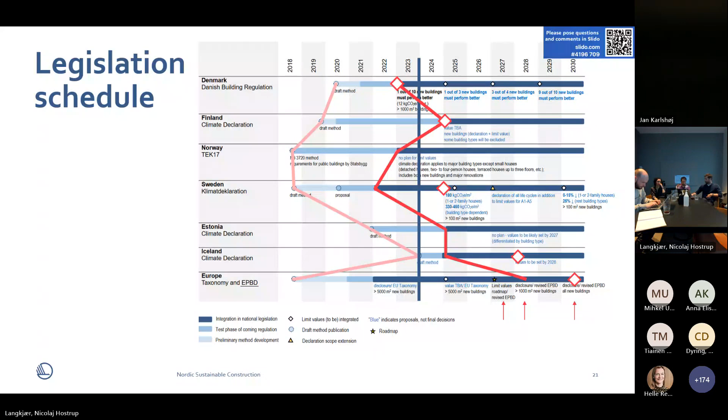So if we go to the next one - now the next slides will cover some selected issues of definitory and methodological questions, and I'll try to talk about what are differences and what are similarities, especially differences, since there's something to discuss that most definitely other countries will also face. So we try to share experiences here.

And then we have special building types in terms of industry, especially, but also summer cottages and the like, which are being treated differently. They occur, but make up a very smaller part of the building stock.

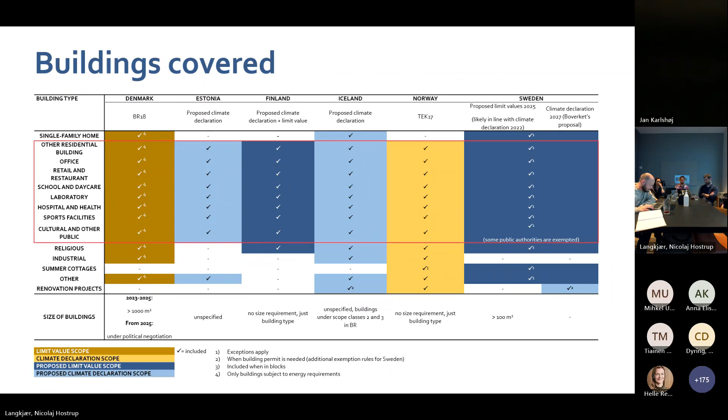Very briefly, the compliance system means how the building authorities are prepared to handle this, and whether there are current plans. This is very unprecedented, because we just have the first regulations in force right now. So Denmark, Sweden, and Norway have some approaches, but we cannot report from experience. This is the newest development, and has probably been considered the latest in this journey.

Finally, a word on different approaches to limit values - how to define what carbon limits buildings should comply with. There are broadly two approaches. In the current regulations, we see the bottom-up approach, which is based on a study of the current building stock and their carbon level, and based on that, developing a roadmap of lowering or reducing the current carbon levels.

So this would be the bottom-up approach, and the top-down approach would be that, as precedented in some studies today, if you divide the carbon budget of a country and furthermore a building sector, which you can do from research, then in theory you could provide a limit value for square meter gross floor area based on these absolute levels, for example in 2030 or 2050, and develop limit values from that. In the end, both will be necessary.

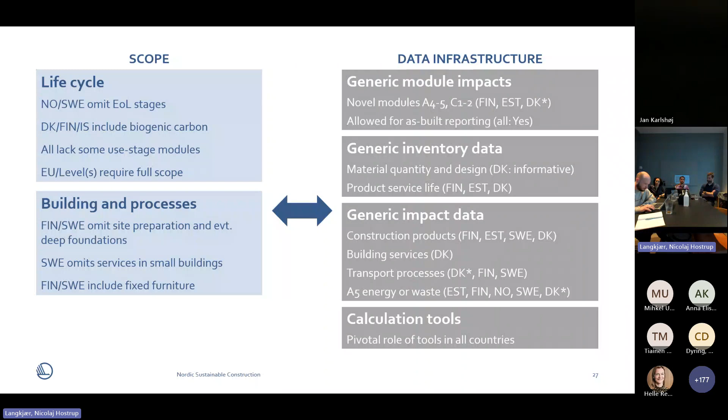Next. Thank you. Yeah, so I give the word to Marie. Yeah, so thank you, Kai.

So now that Kai has given you a nice and brief overview of the differences in the Nordic countries' regulations, I will present some first observations we have made in relation to what is the influence of the most relevant variables for the limit values.

Next. Yeah, so to understand which variables can actually have a great influence, we first look at the existing limit value reports we have in several of the Nordic countries, and this gave us a good first indication of what is particularly relevant and important to further explore.

And at the same time, when we needed to get some additional insights, we used two generic case models and we performed parameter analysis in a way that we altered some parameters and see what is the effect and the importance of different variables. Next.

And the parameters have to do, for example, with the building stock data, which form the basis for creating the limit values, with scope and method related variables.

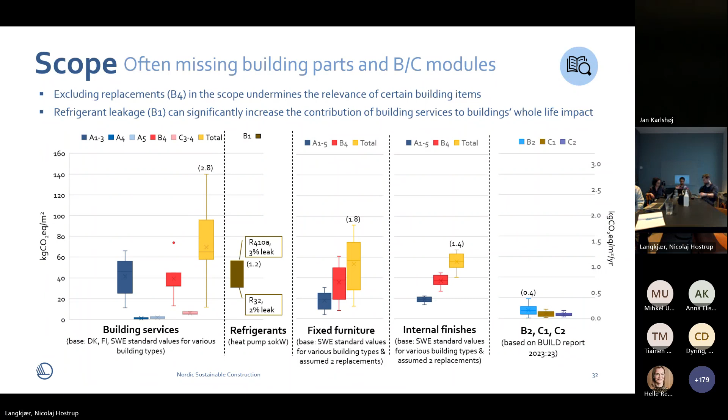This particular building case includes an unheated basement, which increases Finland's and Estonia's results because they use the heated floor area definition. The same applies to balconies, which further increase the results for Finland and Estonia. Also, we want to stress that it's important to start thinking about normalizing results using complementary metrics, like per resident or building user.

This would allow us to account for how efficiently the space is used. With the current reference units we use, which are area-based, we do not actually regulate the amount of square meters we build. This could perhaps be important if we want to achieve our overall decarbonization goals eventually. So let's move to the next topic.

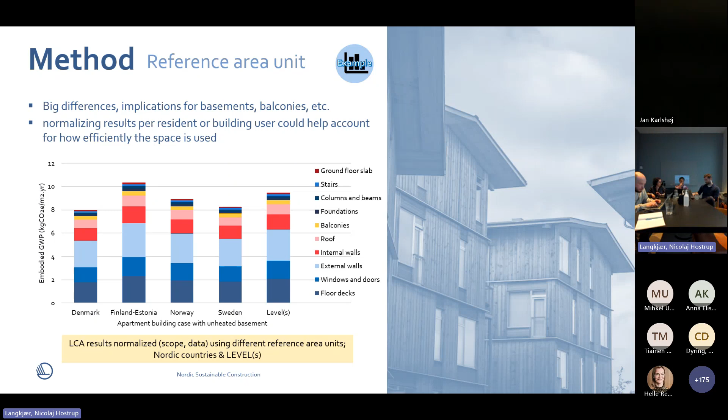Another methodological aspect important in the future is that in some Nordic countries, it's currently discussed how to approach future scenarios for the scenario-based part of the building life cycle, being the use stage and end-of-life stages. We already do this for B6 in the Nordic countries that include B6. There are now many debates about whether we should also include decarbonization scenarios for B4, B2, and C modules, and give greater focus to upfront climate impacts from materials.

We also have the French approach, which uses simplified discount factors, but we can also follow a more detailed approach where we use specific projections for material production processes for different material types.

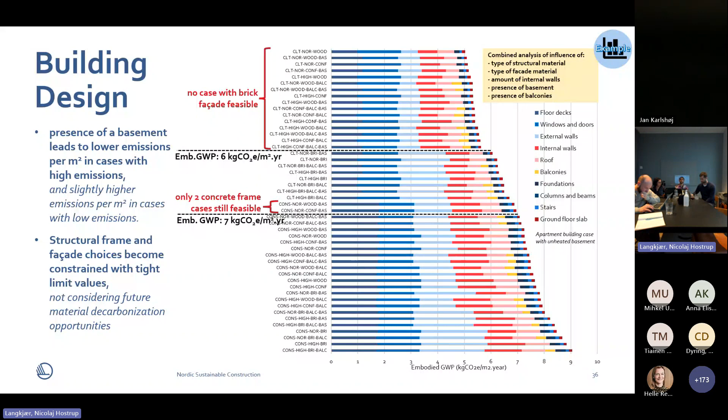Another important aspect to stress is that when deciding on limit value levels, it's important to give some first idea of how this limit value will progress in future. It's always a question how much we can tighten limit values in the future, how low we can go. It's important to distinguish between what reductions can be achieved without great intervention by building actors, and what reductions can only be achieved through actual changes in the way we build - the design itself, energy performance, or construction processes.

The first category of reduction potentials can be, for example, the phasing out of generic data and use of product-specific data, which automatically lowers the level of the limit value. Also choosing better products within a certain product category.

Better products which are available already today can become common practice in the future. We also need to include consideration of how the materials will gradually decarbonize through the production processes. So this is where the baseline for the future should be drawn, below which the future limit value should be decided upon if we want to be ambitious and push the building industry towards optimizing design and choosing low impact materials, not just reflecting reductions that may happen automatically anyway.

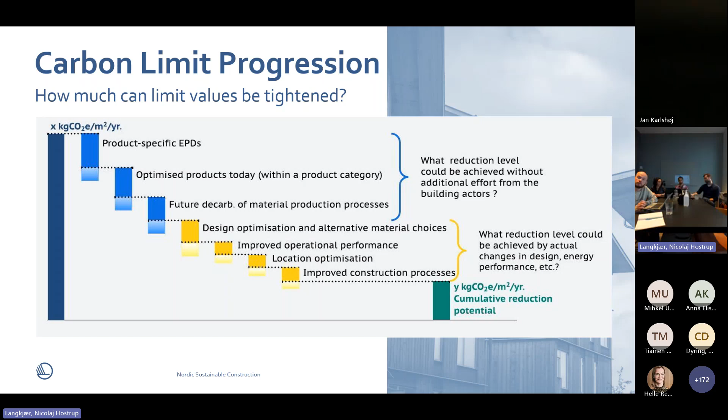Next slide. You can see here a simple exercise trying to understand what it would mean for a typical Danish single-family house to see the progression of the embodied GWP level, which can occur without much effort.

If we arbitrarily assume that today's best available technology within the same product category, without switching to another alternative product, is represented by the 25th percentile of this range, which is a somewhat conservative consideration, then we can automatically achieve a 12% reduction without any effort. This corresponds to more than 1 kilogram CO2 equivalent per square meter per year.

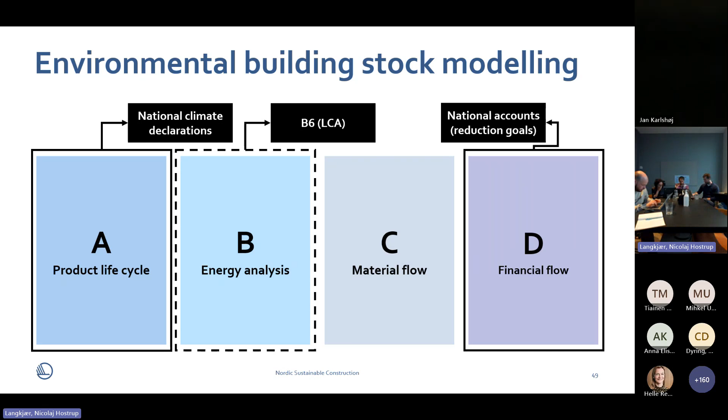I think we will just start with an activity, and then you are able to vote during this entire presentation. I'll open it and go on, because we're also a little bit tight on time. So which environmental building stock modeling approach do you see best fit for assessing the decarbonization efforts? Jumping on to the next one here.

We have identified three different modeling techniques that we found applicable. The first two are also the ones that Kai and Maria mentioned: archetype modeling with LCA and energy simulations. Archetypes with emission factors are defined. Monitoring on building stock level could be achieved by utilizing data on added square meters per archetype. Then we have the sample approach, where we sample all the climate declarations and get an overview of the whole building stock.

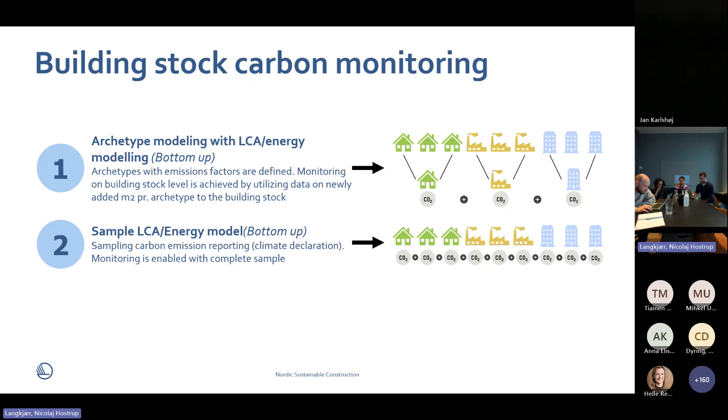Then we have this last one, financial modeling, which is basically already happening in some different ways. We know that Sweden, for example, has developed a more detailed, more sophisticated way of calculating this, but they are all based on environmental input-output analysis. The main difference here is that two of them use this bottom-up method based on product lifecycle modeling technique, while financial modeling, typically this environmental input-output model, is based on financial flow analysis and is more a top-down approach.

The two bottom-up modeling techniques for monitoring are still to be established, as you could also hear in Kai and Maria's presentation. There is still some work needed to be done here before we have what we can say is a monitoring that we can just apply right away.

One of the other main differences we identified is the possibility to investigate both cause and effect, which was at least our goal in our recommendation. With the two bottom-up approaches, we see that it's possible to investigate cause and effect of emissions on building level, and also inform impacts on these regulatory limit values. With the financial modeling, we are kind of restricted to investigating effect on a macro level.

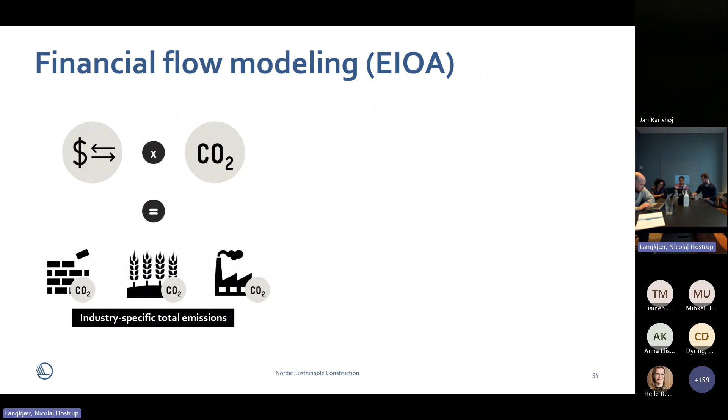And then, of course, this problem I talked about before, that we couldn't really look into causes on a building level, only effect on a macro level. That's kind of why we recommend using one of the other types, which we'll also go into now. So that was our strengths and weaknesses with these two, this model.

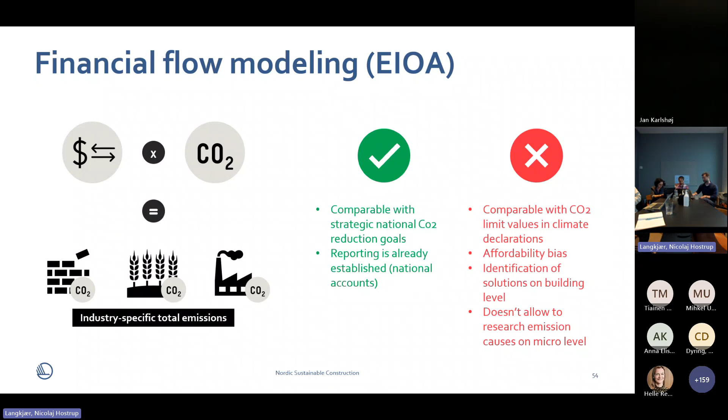So what we did was we mapped out the existing building information database landscape in the Nordic countries. I'm not going to go too deep into this, you'll be able to read it in the report we sent out after this webinar. This was to identify the possibilities of utilizing existing data for environmental building stock monitoring. For each country, we gathered in all the databases that existed on building information, creating an inventory that summarizes the databases and information sources available in each Nordic country.

Now that we've ruled out the financial modeling, at least for this particular task, the financial models are still a very powerful tool - we know that for the national goals and so on. But for these particular recommendations, where we want to look at cause and effect, and harmonize with how we set the limit values, we recommend going with either the archetype modeling or the sampling approach, as we call it.

What we see is that with archetype and sampling, it gives us the possibility of looking deeper into the causes of emissions on a building level - at least if the data and structure of the data is good enough. What we could see from our database landscape mapping, which you'll be able to read in the report, is that creating this monitoring approach based on samples is not possible yet, at least not with the currently recorded data in the Nordic countries. That is why our first recommendation is to create an archetype approach in the Nordic countries, where we construct a monitoring model for each Nordic country.

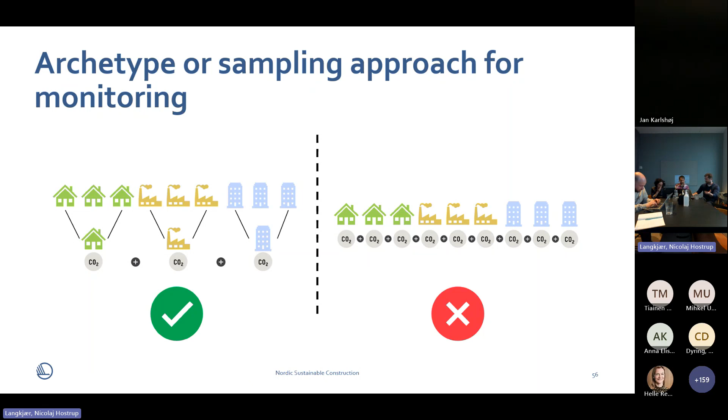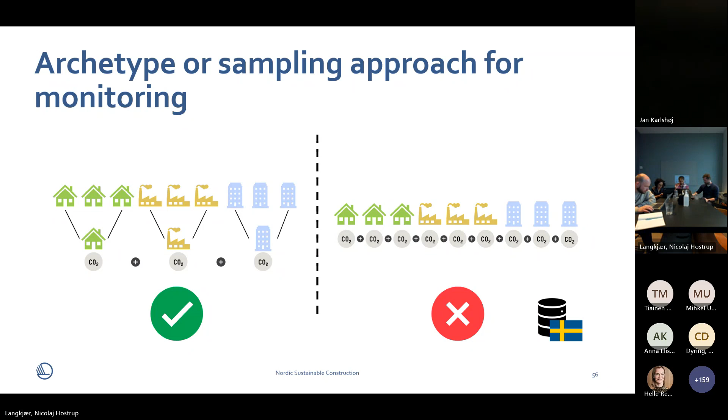And what I said about it not being possible yet is not actually entirely true. You saw in a previous slide that Sweden has actually introduced a digital infrastructure to record this data coming in from the climate declaration. So it is coming. But yes, our first recommendation here is to look into archetype modeling.

The current data landscape allows for establishing archetype models, that's what we could see. There are still some next steps needed before we can actually start monitoring, and that is, of course, defining these archetypes. We would recommend that they be based on the archetypes represented in the building register databases.

We would also need to define emission factors for these archetypes. We know there's already some work done in some countries defining these archetypes and emission factors, so it would be good to work further on the backbone of that research. And then, of course, with all new processes, we'd have to define a process for updating emission factors and a good process for operating the database and so on.

We found this approach suitable for developing building stock scenarios and these top-down target-based limit values, as Kai and Maria presented. A good thing is that a smaller representative sample could be used for monitoring the entire building stock. Potential issues here are that there could be a risk of systematic errors - representativity depends on the data input, and the database infrastructure is not really established yet.

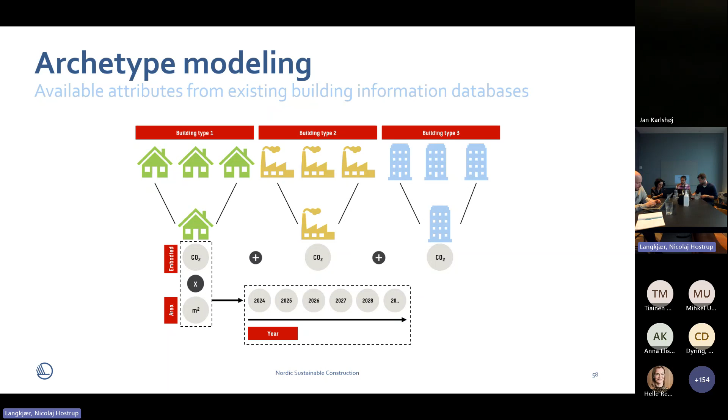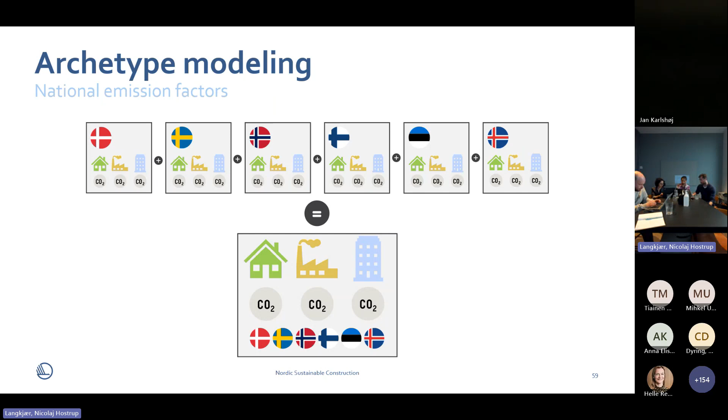Jumping to the next one - if the archetype modeling approach is introduced and used, we recommend defining the same building types but using national carbon emission calculations. That's also what you saw from Kai and Maria's presentation: even though we take out all the variables, for example biogenic carbon, and compare results, we still see that generic data varies in each country. So by having the same archetypes defined, the data can be aggregated to a Nordic level, a Nordic monitoring level. Our next recommendation here goes back to this sampling approach, which we actually really believe in.

So we believe that the introduction of these climate declarations in the Nordic countries, and also the EPBD which states that GWP should be disclosed through the energy performance certificate anyway, will really qualify this sampling approach as the best option for monitoring the entire building stock. We believe that if we build a good database infrastructure, it would be possible to gather environmental impact data on building level, but also on aggregated levels, making it possible to pull relevant data and monitor comparable data in the Nordic countries.

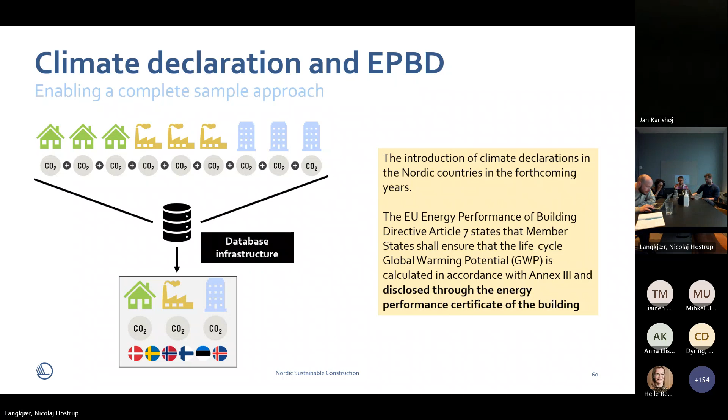Yes, so as we defined in our investigation in 4.1, just a little bit on the positives and negatives with this recommendation. The positive is that with the mandatory climate declarations, we found this a really suitable approach for as-is analysis of the building stock, and with a complete sample, the suitability for developing limit values is also very high.

The potential issues here could be that we would need a large, or at least a complete, or at least a very large sample of buildings from the building stock for validity. And also, as mentioned before, the database infrastructure doesn't really exist yet, so we would have to establish that.

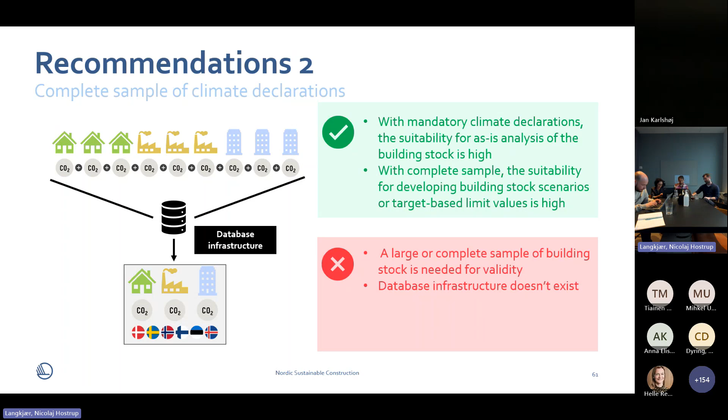So this is one of our main recommendations. We really strongly believe that building a good database infrastructure to gather the information we get from the climate declarations is a strong approach. We could say you could get inspiration from the Swedish method already.

And our recommendation here also goes quite well hand in hand with, at least, the latest recommendations from this report from the Danish industry, which is Denmark's largest business and employer organization, which has this action-oriented think tank for the building industry. Here they state that to ensure uniformity in the reporting of LCA results, we need to establish a standardized reporting format, and LCA results should also be collected in a database to ensure that knowledge of a building's footprint can easily be shared. So we are going very well hand in hand with this.

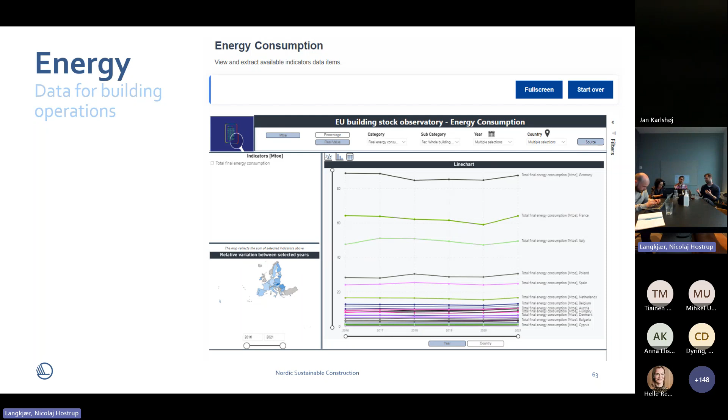Just shortly, if we had to include this energy use operation, we could either include the predicted data from module B6, which has also been mentioned, and which is being reported in some of the climate declarations, but we could actually also include a data source on actual use data. Here we recommend following the method used by the EU Building Stock Observatory, established back in 2016, which keeps track of the EU building stock's energy performance.

Just a quick note, I see we're running a bit out of time on task 4.1a and c. In task 4a we mapped out these Nordic countries' national climate goals: the national carbon neutrality goal, the carbon reduction compared to 1990 level goals, and the renewable energy goals. You'll be able to jump more into this when you read the report. And in the last part of this, 4.2, we've reviewed four different initiatives and research papers which all include elements for forecasting and scenario modeling.

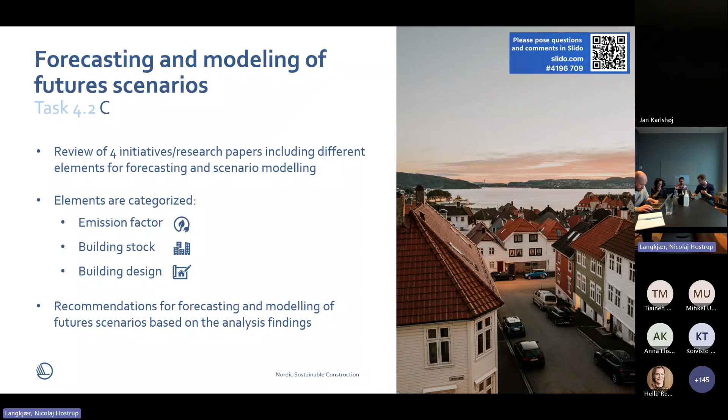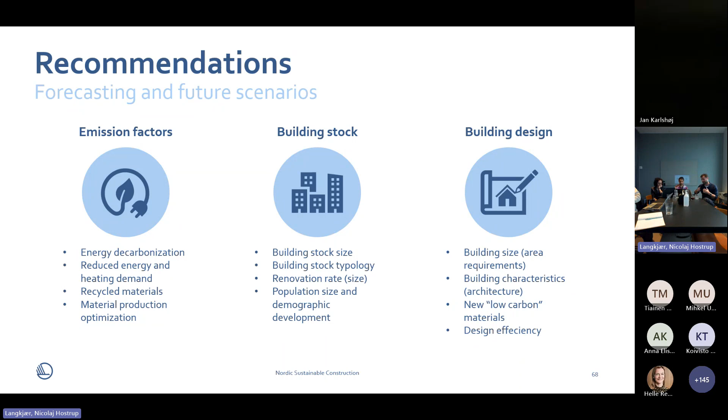Just a quick comment here, these were the findings from the forecasting and future scenario modeling. And just a quick note, as I've also been teasing a little bit, we will have a draft report for 4.2, monitoring the decarbonization of the building stock, published after this webinar for you to comment. I think we set the deadline for the 15th of February, correct? Yes, yes. So that was it for me.